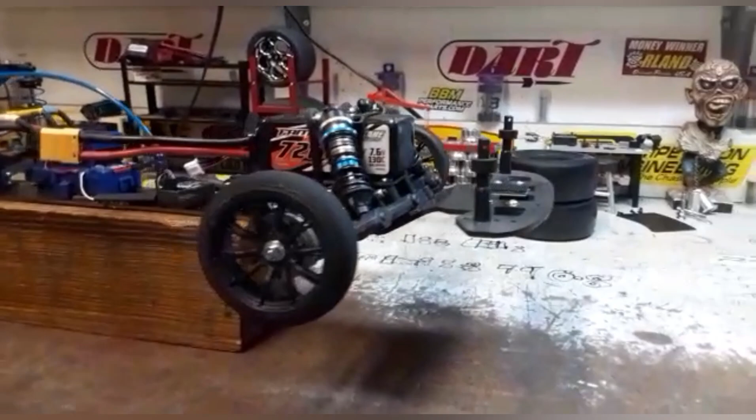I spent about 3 days on it, and I learned a lot about how to make the most of limited power. Most of it, I have to say, guys, was playing with gears.

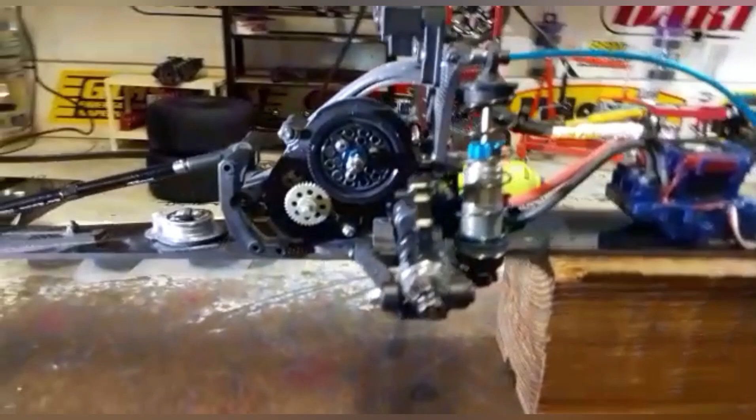Like I say, I have pinions and spurs, and I've probably tried every pinion and spur from like 83 to 69. I ended up with 77 on the spur and 37 on the pinion.

After I optimized that, meaning I'd give up some mile an hour for ET, it went up to almost 60 mile an hour. I ended up gearing it so it would lay over about 2 feet from the ET cone. This is where I ended up after 2 days of testing.

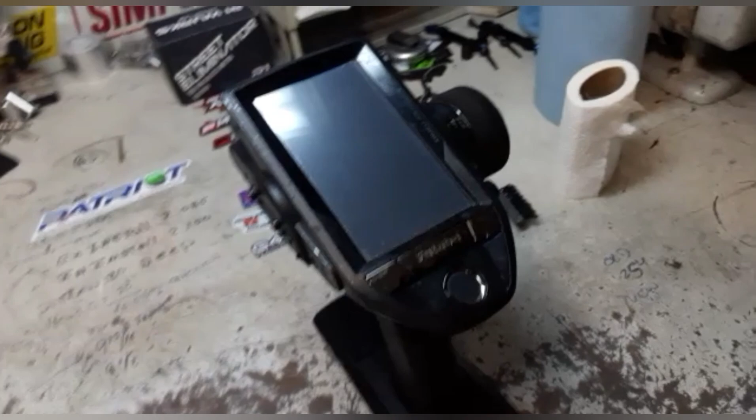Then my friend Rob talked me into getting my Futaba update when we were at the RCDRL. In fact, he did it for me and gave me the rundown on the update and the throttle curve. I'll show you where I ended up with this on GNSS. Haven't had it at the track yet.

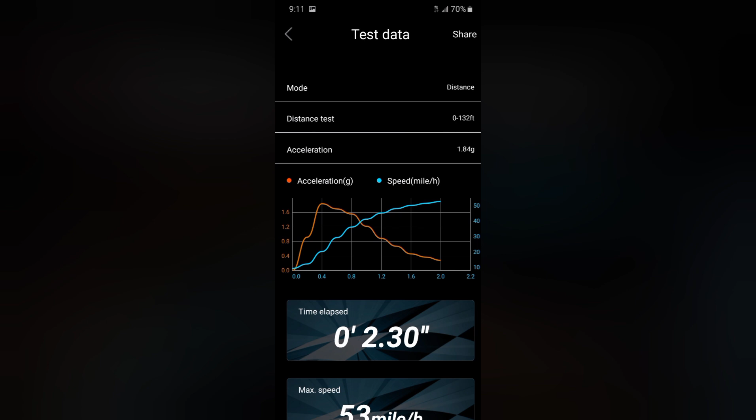So that was about 25 runs, and I just kept those few. I think the first time I laid it down, it went like a 298.

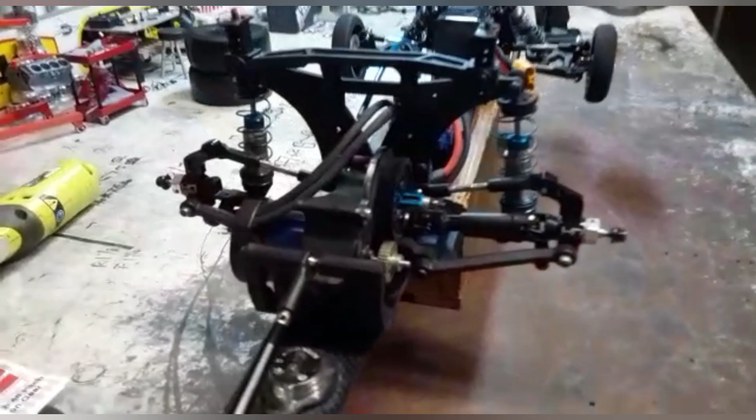I was way off on the gearing. By the time I got it right to where you saw that 230, the motor would be smoking hot by the end of the pass. When I went to back up that 230, I ended up breaking a damn axle.

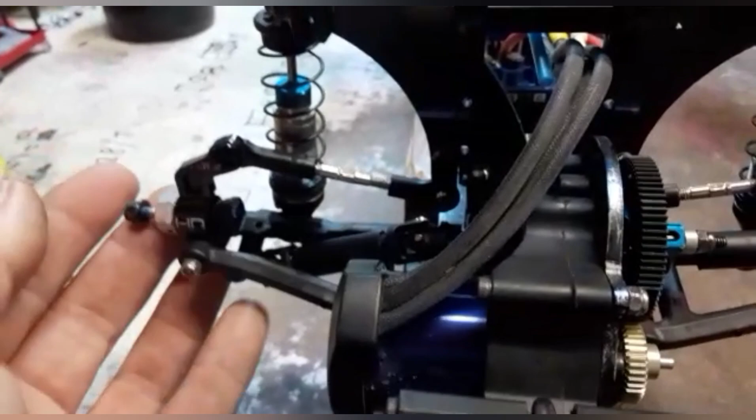So I'll be back out with the car. I got more gears to try and stuff.

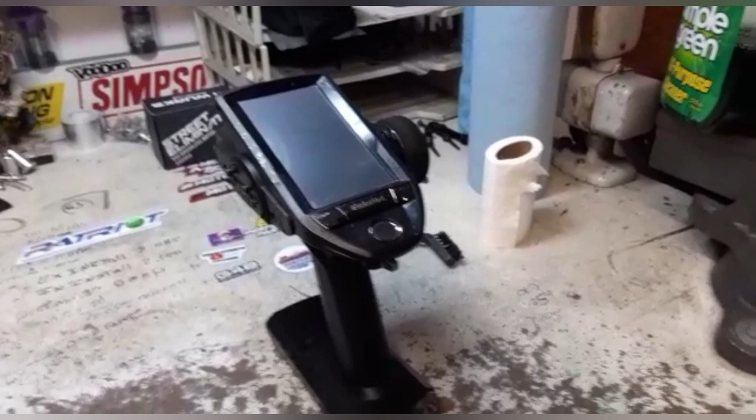But what I was really thinking about is how cool the update is with this throttle curve on the 7PX. I'm sure I'm not the first person to know about this, obviously, but I'll go over it in a minute.

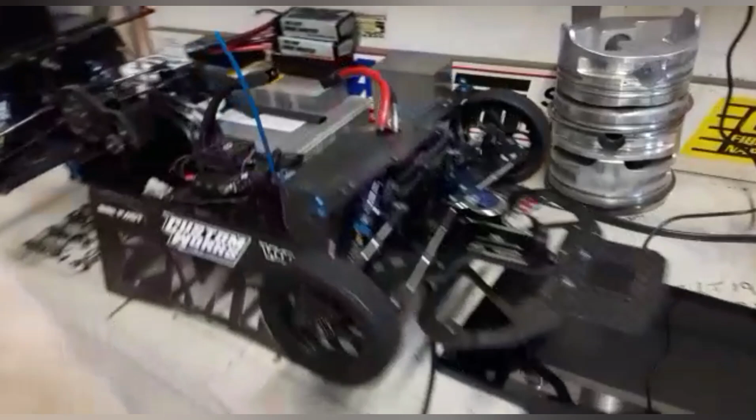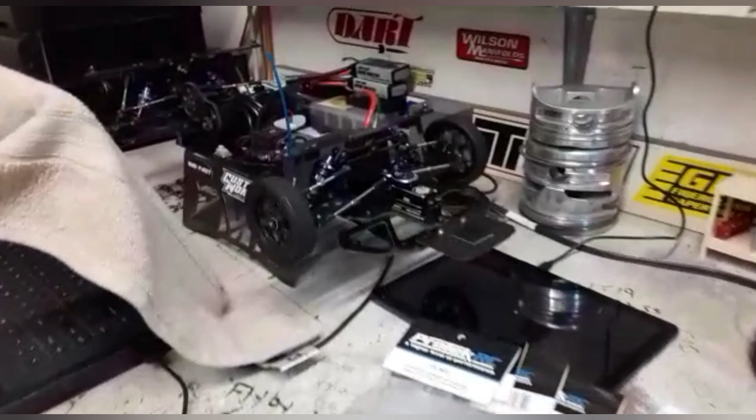What I was thinking was, I always thought the gun overruled no matter what you did in the ESC, and I think I just proved it to myself. I'm sure other people do or do not know - I don't know, not the fastest guy on the planet. So I said, let me do an experiment with my Outlaw car and take the curve out of my ESC. I'll show you the results of that in a second.

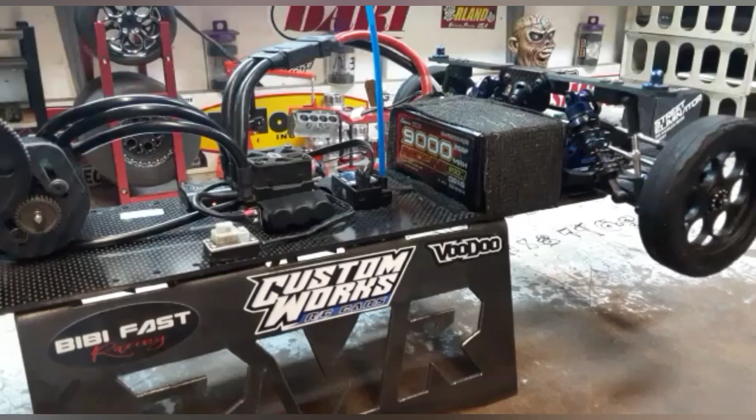So like I was saying, once I got the gearing right and everything, I wanted to try an experiment on my Outlaw car. So what I did was, I went inside the ESC, and we all use throttle curves - I'd say 90% of the people I talk to.

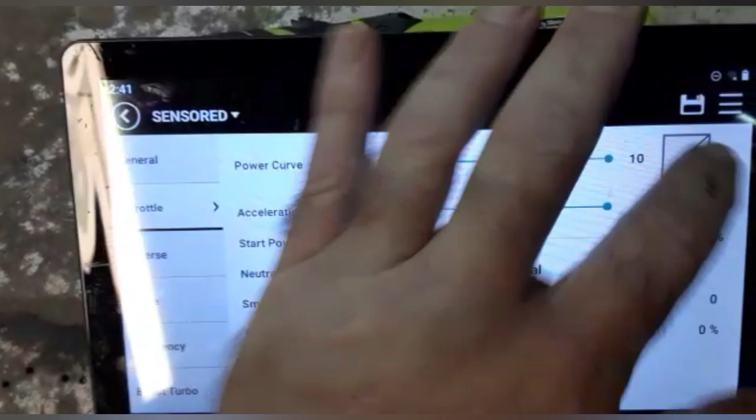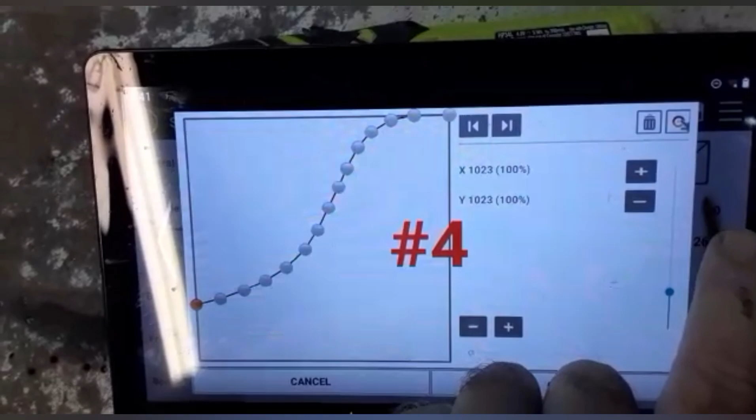So I got all the throttle curves. You make them yourself, you got 10 of the presets. So I went in and I made a linear one. Other than that, I didn't change my tune-up or anything.

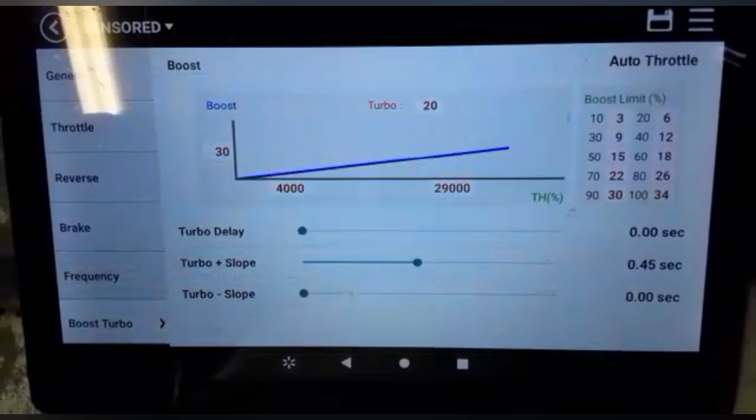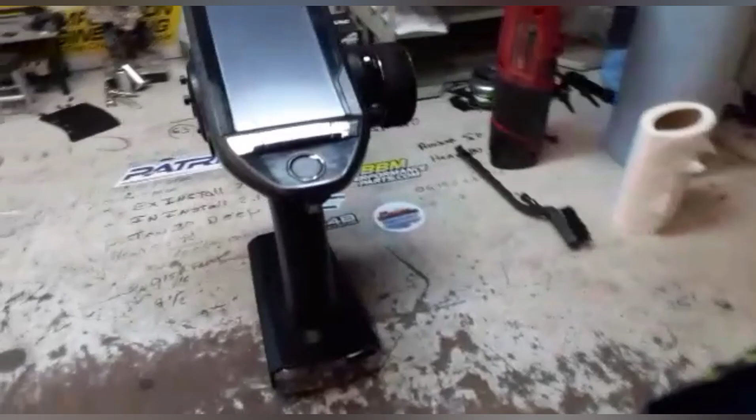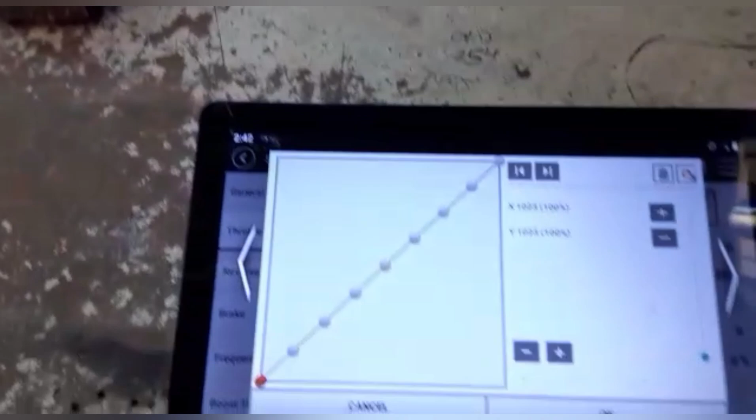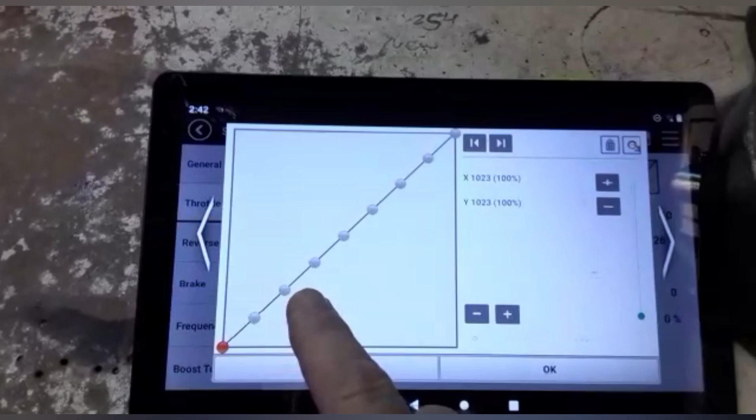This would get in the middle of it and override it, and you would blow the tires off, because if I started down here and made a curve like that, if the ESC overruled the gun, I think you would actually get in the middle here, and the car would come alive until the curve regathered it. Maybe I'm wrong, but I don't think so anymore.

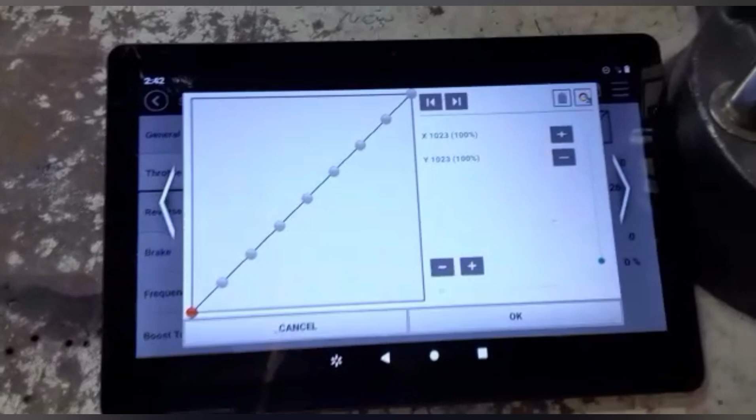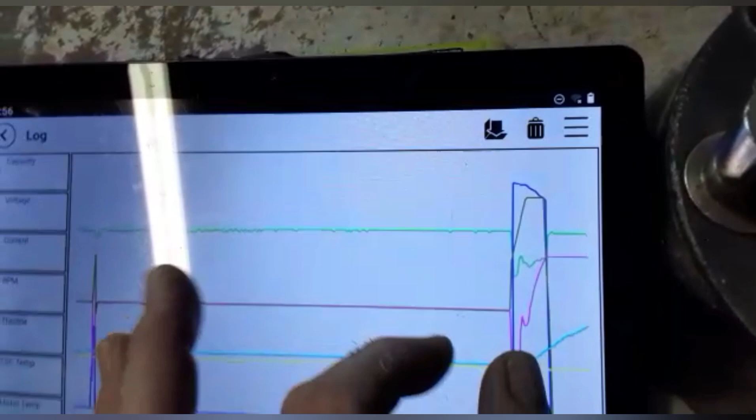So here's what I feel like is the cut and dry proof. If you had a curve, let me show you on the data log here - load up the 160. If you had the curve in the ESC, it would show up on the data logger. As you can see, the point.

You can see how it spun on the 160 and then it went out the back good. I think the auto throttle saved it. But look how late in the run it was, even though it was a good run, almost a 1.5. Just about mid-track, it's at 100% throttle.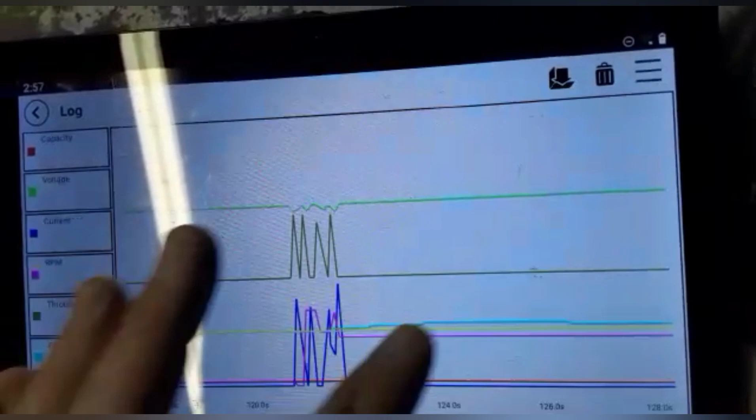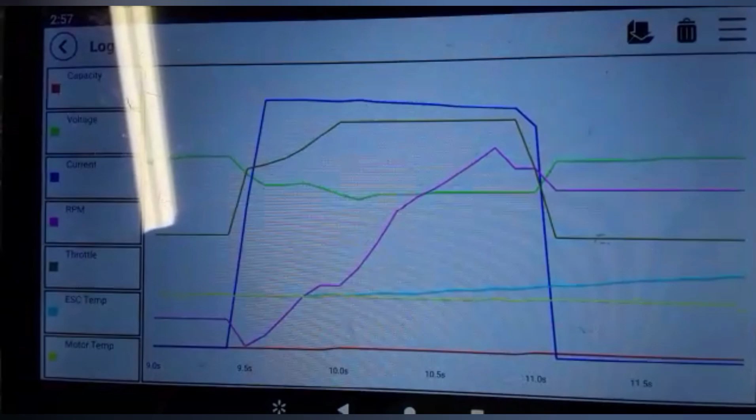Now, if the gun didn't override the ESC, why don't we see that curve in our throttle curve in the ESC? But you sure do see it when you put it in the controller. So I feel what you do in the ESC is giving you your electricity power by timing, but managing it overall, I believe the gun has the final say.

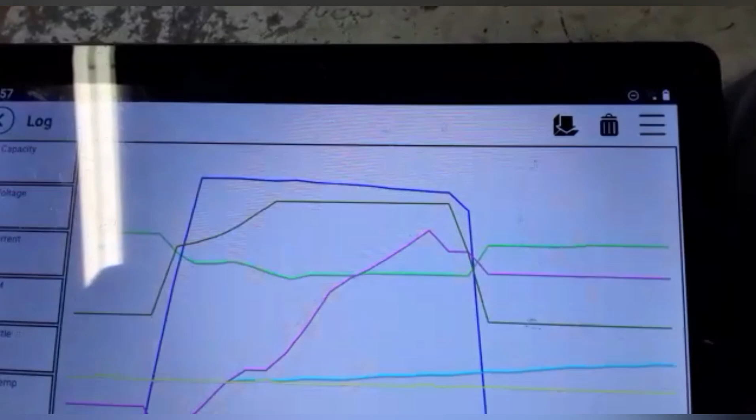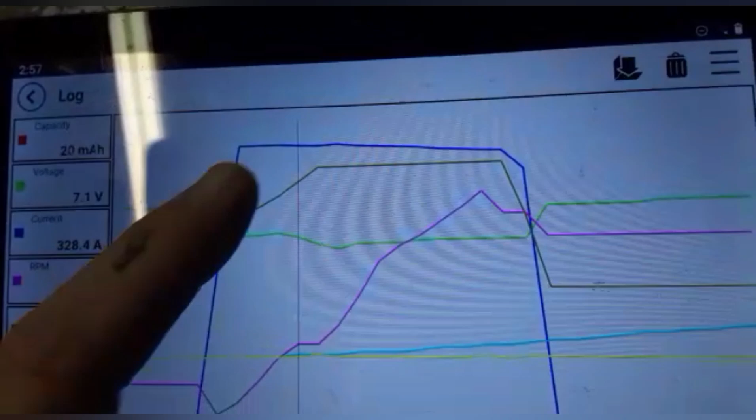So with this throttle curve update, with a point and a ramp, excuse me, with the curve, as you can see, it leaves good now, but look out the back door. She's spinning, and it still went a 170 flat. Look how much earlier in the run I can achieve 100% throttle. That means my turbo can be more because it's lasting almost 5/8 of the run.

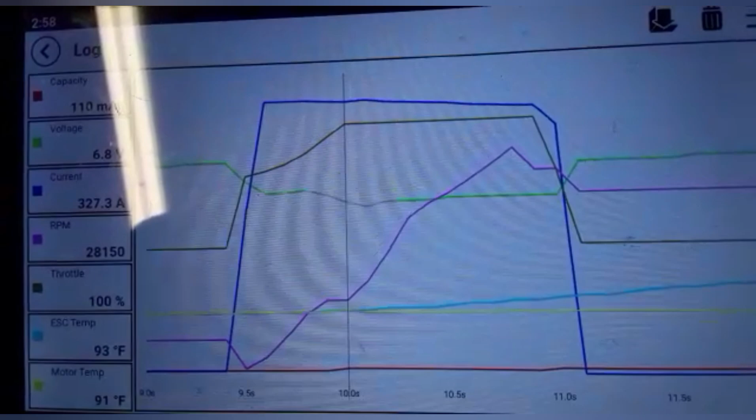And you can see when it kicked on, boy. So now we'll be able to tune it maybe a different way, not so boost heavy. Again, I'm learning, guys. Let me get you in the gun and show you what I've found out so far with the curve and see how it goes. Let me show you.

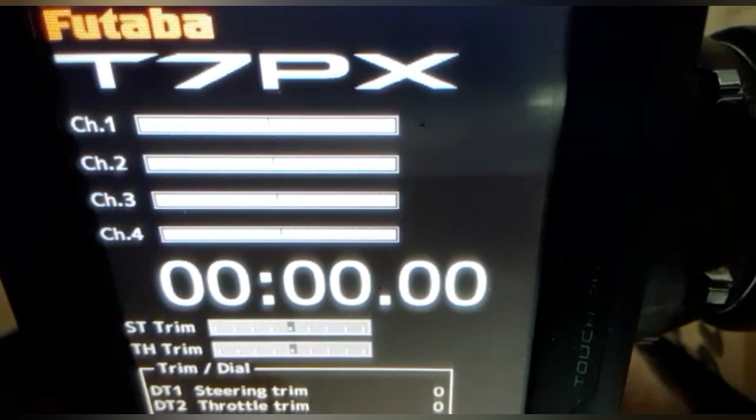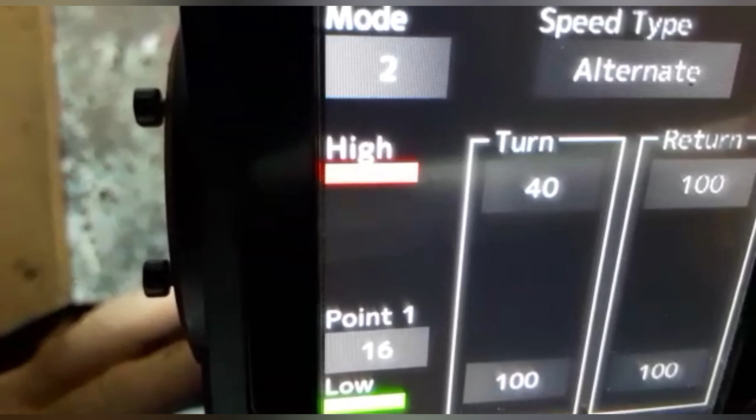All right, guys, back here with the controller. Like I said, I've never even touched an M17, so I don't know. This is just my experience. So once you get your update, it's free from Futaba. You're gonna go to menu, race, select your speed. Now what you'll notice right off the bat is my point is nothing, but my ramp is at 40.

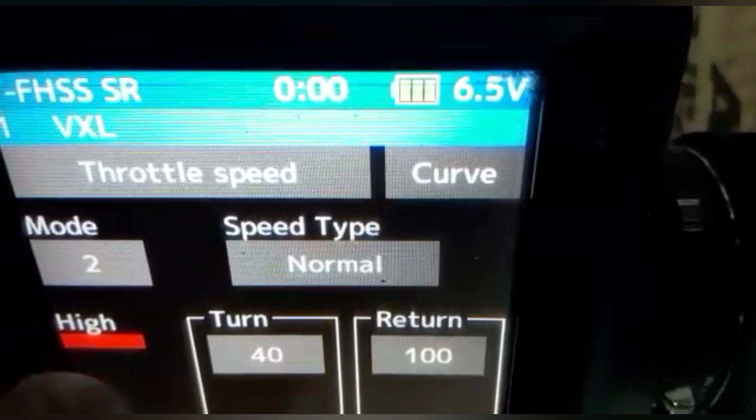So let me show you why. Once the update is done, you'll have alternate and normal. You're going to hit alternate. Because once you get to this curve, what I'm talking about here, see? Watch when I pull the trigger. This is the VXL car.

So the reason why you don't want the point high is because it's going to be right here. And you don't want it to start here. So boom. You hit full trigger and it starts right at the beginning, and then how you control that is the same way. You take the point, let's turn it down to nothing, like I did with the Outlaw car for that experiment. Now watch. Okay, so that's how fast you get into it.

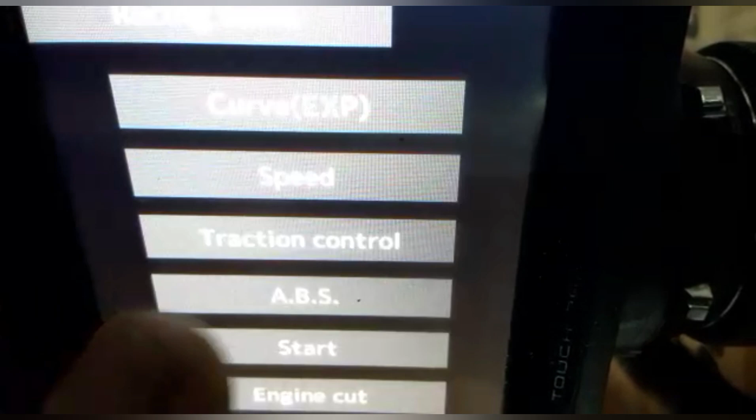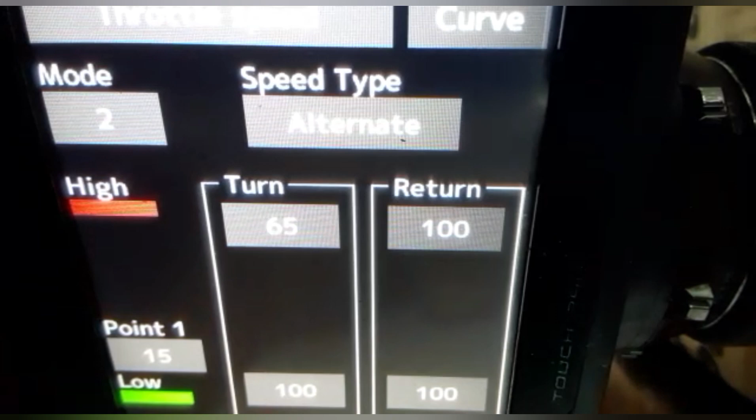Okay, now let me change it over to the Outlaw car. Crazy, huh? A point of 15, they're both the same because they're gonna start in the same place. But look at the ramp, 65. Put the curve in there. I put it like this, hopefully you guys can see, but that's the curve I did the 170 on. Again, it's gonna start right there, but look how fast.

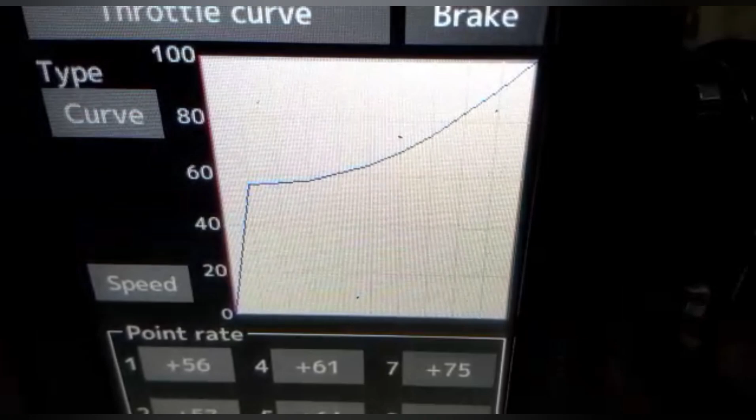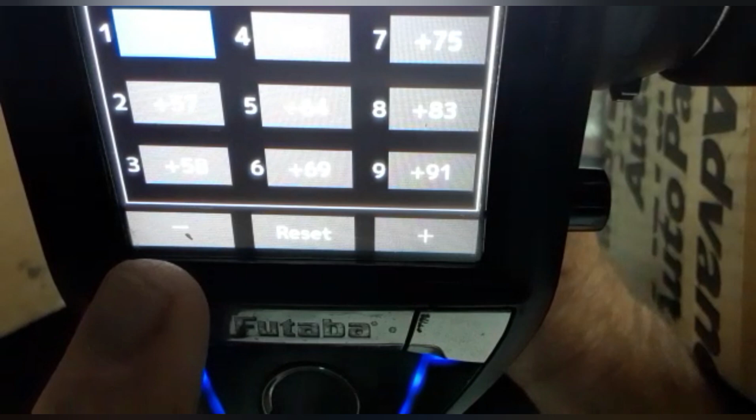Isn't that awesome? I mean, you can see it overrides the ESC, or else you would see it in the data logger. Looks very similar to what's in the data log, because that's exactly how electricity is getting fed in. So let me show you how to change it. You just pick a number and it'll put a bar up, and that tells you the area of effect. You hit the plus or the minus to do what you want to do to that section that you just lit up.

So just go like that, and bring them all down. This is like the ramp I was doing when it went like a 230. So no matter how much timing you have in it, I'm just trying to do it real quick, it won't matter because this is telling the ESC, I don't care, you want me to put 50 degrees in, well, this isn't gonna let you. Putting something in real quick.

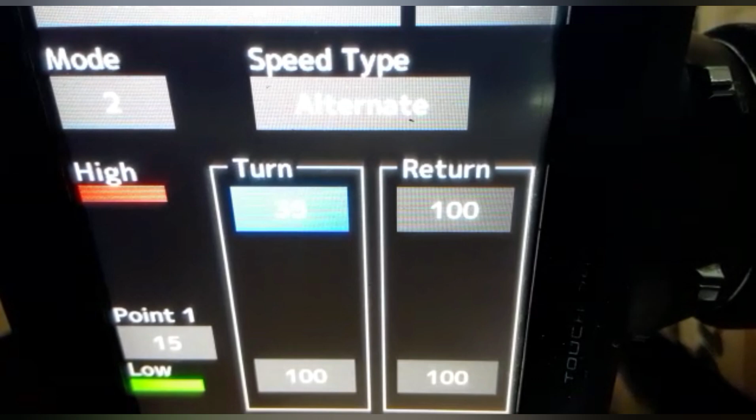Because really once you get your curve started and you get it right, you're only really gonna adjust the front. So let's say this is the curve. Okay, something like that. So see, the point and the ramp haven't changed, but I'll slow it down. Go from 65 to like 20. 20.

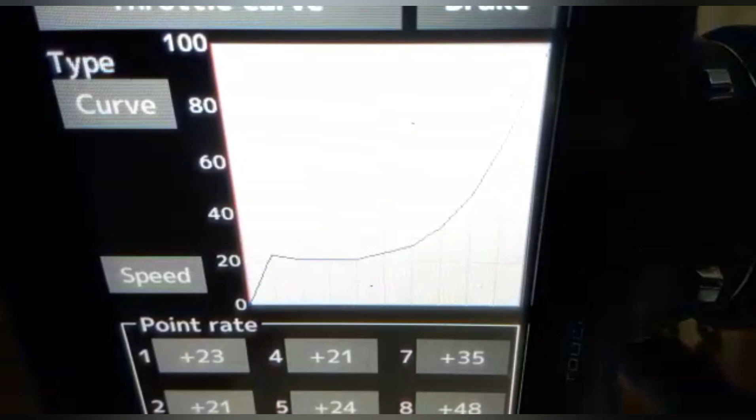Remember, don't forget to hit alternate, or else when you go to the curve, the trigger will be 100%, see? So don't forget to hit alternate. Right here, where it says normal, hit alternate, go to your curve. Now you know it's down on power. This is like what I had in when I went at 230, even though it had 50 degrees of timing in it. See what I'm saying?

It's awesome. Now say this curve is right, and it was the one I went 170 on, but the track changed, and it kind of got stuck on you. You just come in here while you're standing in line, because you're gonna know it just like you know your tunes, right? You just come and crank it up a little bit. The tune's already in the ESC. And now, boom, you're leaving harder, whatever you gotta do.